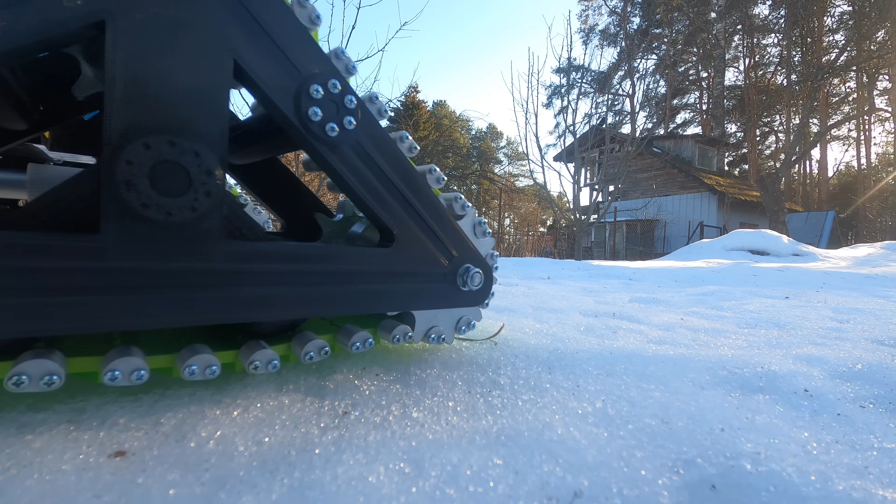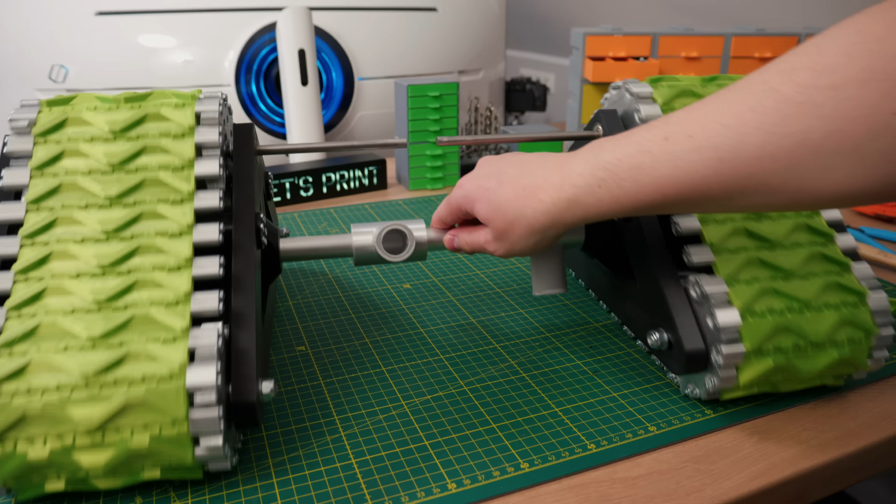In the last video I built tank/tractor tracks and it worked absolutely perfectly. I told I will build a full RC vehicle that will be driven by those tracks. In this video I do exactly that. The tractor will drive, as you saw in the intro, but it won't steer yet. The whole steering system I will build in part 3. But for now I'm going to build the most complicated part of this tractor, the driving mechanism that makes the tractor moving forward or backwards. By the way, all 3D models are completely free for you to download, so if you wanna print and build this by yourself or just investigate my design a bit more closely, links are down below.

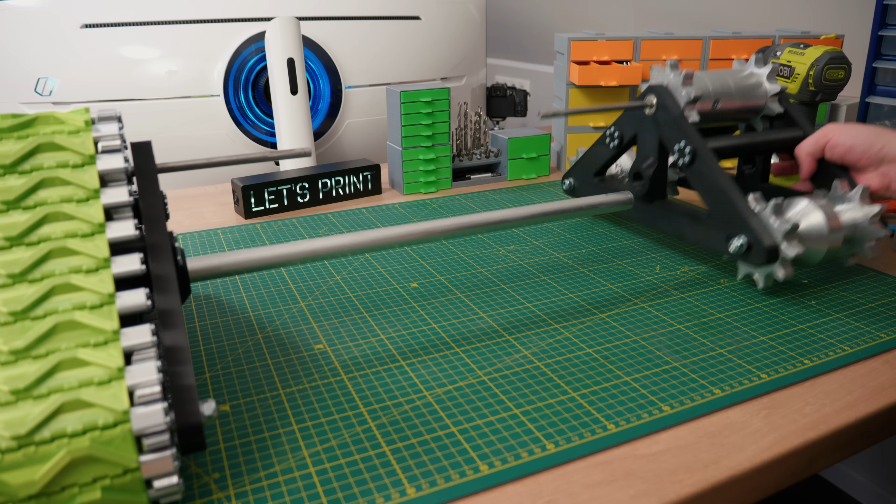In the last video I built those tracks. Off camera I finished another one. I will not focus on those tracks in this video because I have a whole video about those. So for now I have to attach the second one to the other end of aluminium pipe. Well, here is pretty much stuff to do, so let's get right into it.

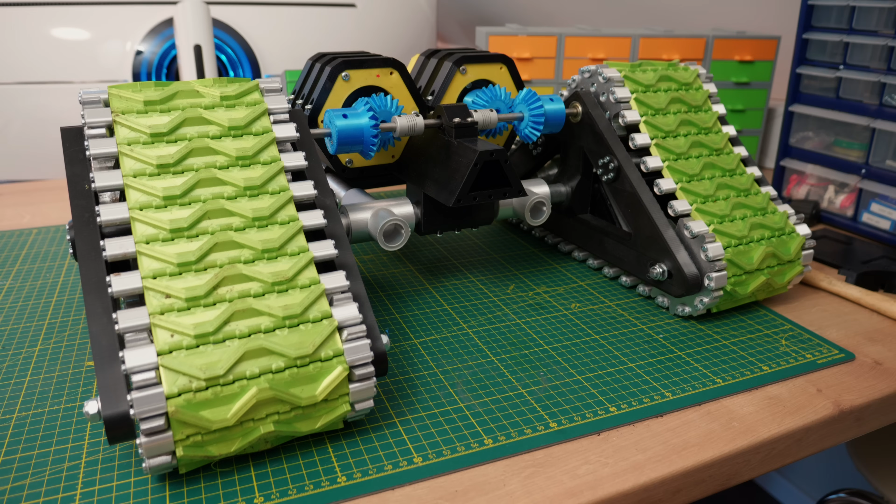But for now, let's continue with my tractor. Really quickly I explain what is going on over here. A 775 DC motor runs this yellow stackable planetary gearbox. This is my design and I have a video about it, if you are interested, highly recommend checking it out. Those gearboxes have a 1:27 gear ratio and it's absolutely perfect. This blue bevel gear is attached to the gearbox output. The other bevel gear is attached to the shaft that is attached to the driver's sprocket, and this driver's sprocket will drive the whole vehicle.

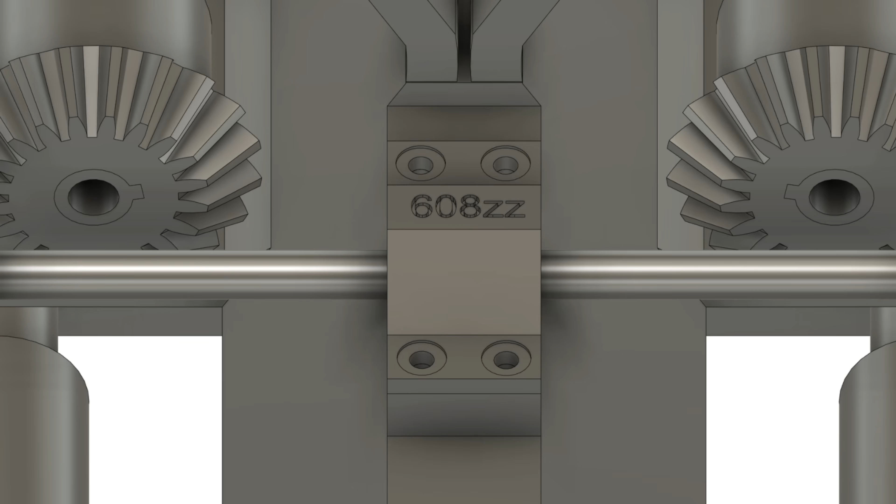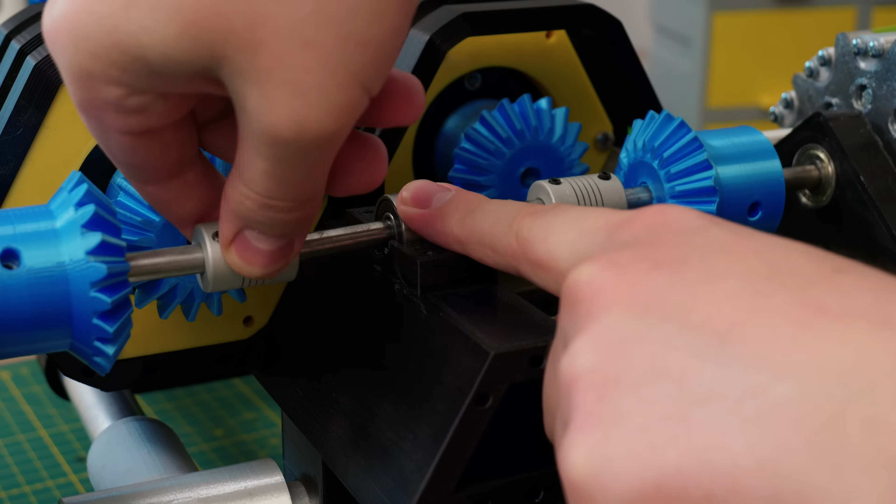About this shaft, I actually changed my original idea. My idea was to run left and right side independently, but I messed this up. One shaft was too short and it didn't reach the bearing. Because of that, I cut both of them shorter. I added one piece of shaft between those and connected them together with a coupler. The good thing about this is that both sides will always move at the same speed.

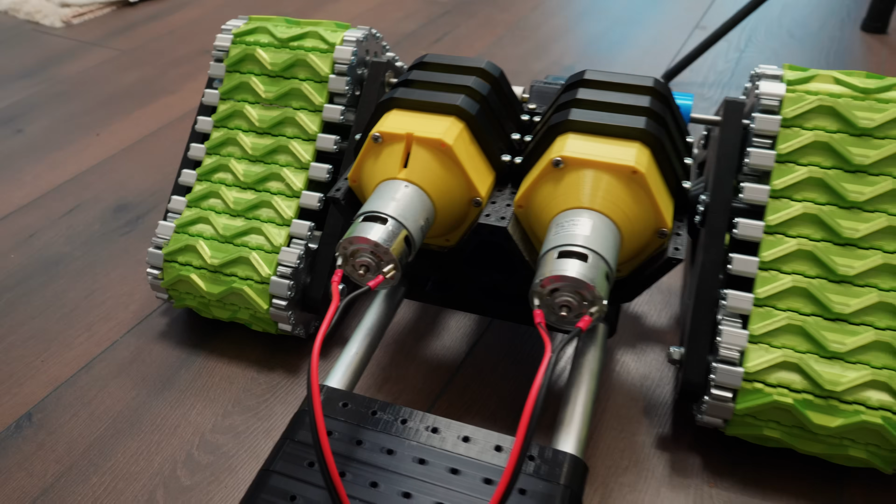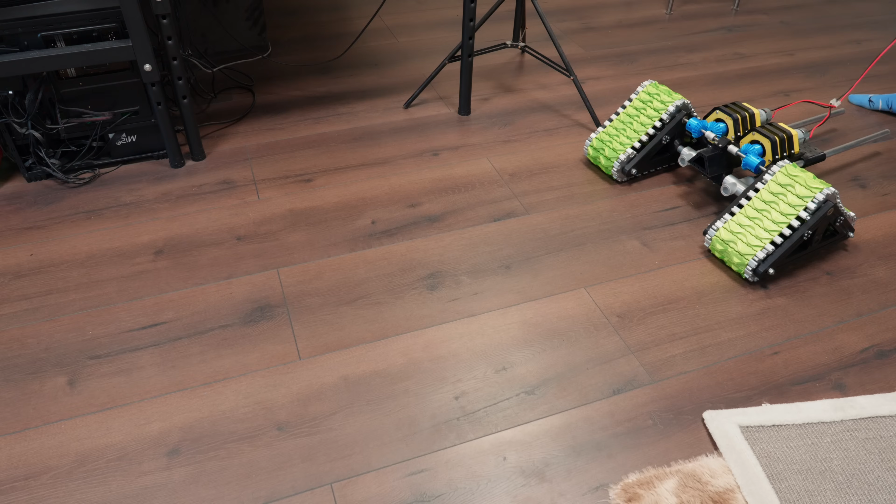Bad thing is, I can't steer this like a regular tank. When the right side moves faster than the left side, the tank will turn left. Now this type of steering is not an option, but I didn't plan to steer my tractor like this anyway. In the next part you will see how I will steer this tractor. To test this right now, I also wired those two 775 DC motors to my legendary DC motor speed controller, and power I will take from a 6 amp LiPo battery. Later I will use an ESC, receiver and transmitter. But this is my really first test right now.

Wrong way. Good enough, let's go outside.

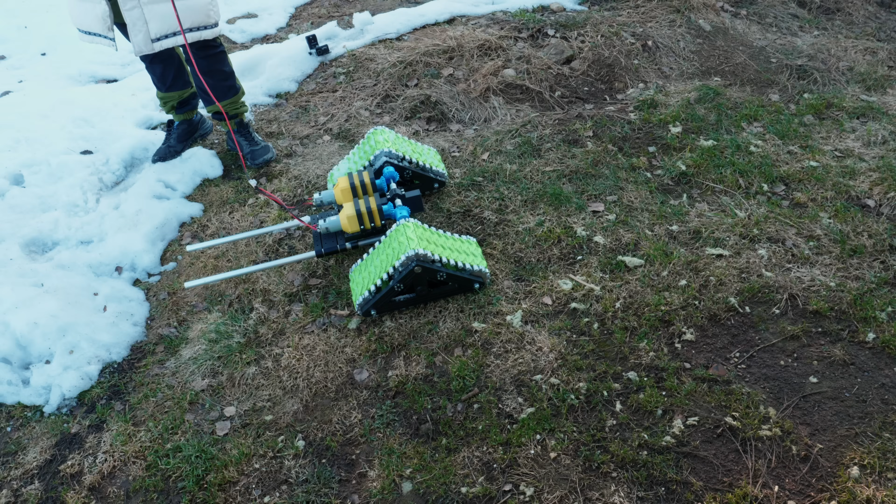This amount of the tractor that I have right now surprised me really positively. In the sketch everything works, but in real life there is always something that you don't see and won't work, or it's impossible to assemble, and so on. This is a really big and complicated project and still there have not been any major setback.

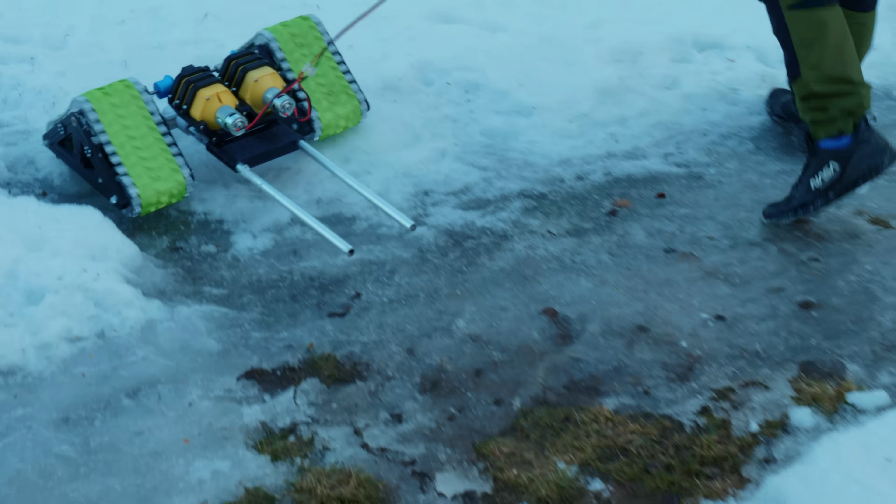There is part 3 coming for sure, and in part 3, as I told before, I'm going to build a steering system and add all the electronics that are needed to drive this tractor with the transmitter.

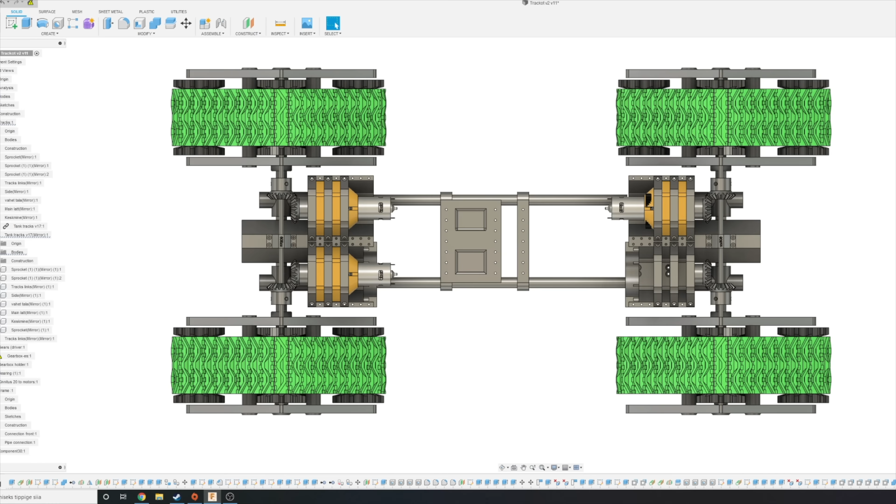And number 3, basically I have wheels at the back or front, I haven't even decided what end is which. This is how most combines steer, or even some types of tractors. I probably will choose the last one. I like the last one, because this is something different. If I choose the second one, it will be pretty boring in my opinion, because I have to build everything that I have already built again, and there isn't something new for part 3. Those are the options. By the way, I haven't started the design yet, so please leave a comment on which steering I should choose, or which you like the most.